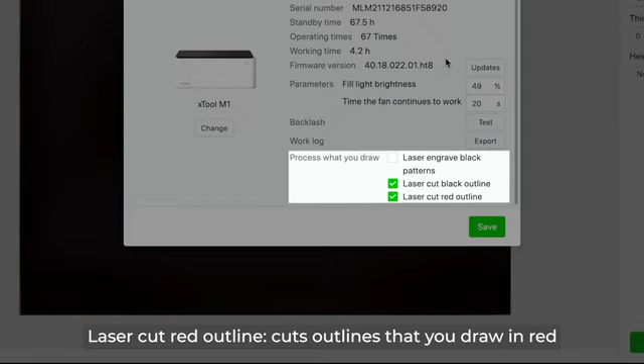Process what you draw. This is an offline function. The device can recognize what you draw and process it without connecting to XCS, and you can set how it works. Laser engrave black patterns. Engraves patterns that you draw in black. Laser cut black outline. Cuts outlines that you draw in black. Laser cut red outline. Cuts outlines that you draw in red.

Import. Import an image. After importing an image, you can set the properties of the image. Filter. You can add a grid filter for the image. Sharpness. With other settings unchanged, sharpness is related to the clarity of detail in an image. Grayscale. The grayscale is related to the contrast of light and shade. Slide the block on the left to the middle to enhance the shade. Slide the block on the right to the middle to enhance the light.

Insert. Select to draw a common shape. Line. Rectangle. Circle. Shape. Inserts a shape. Text. Inserts a text. The default text is "your text here." After inserting the text, you can change the words, set the font size, typeface, and spacing.

Vector. Select to draw a vector path. After drawing a vector path, you can double-click an anchor point to convert it to a rounded corner, or back to a corner, and adjust the curvature.

Extract. Extracts images from the image captured by the camera of a device. This function is available only when XCS has connected to a device with a camera. You can use the magic wand, eraser, and crop tools to extract the image you want, and then you can use the image for processing. Crop keeps the area you select. Eraser erases the area where you click from the image.

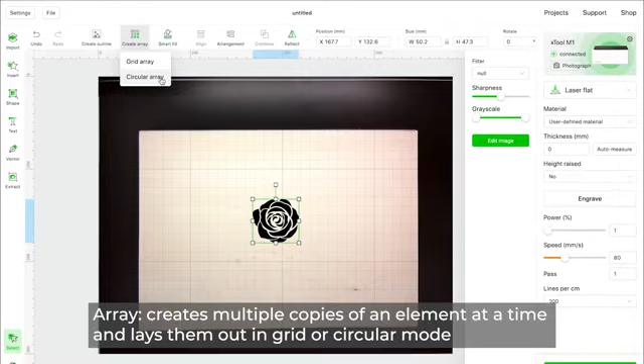Smart Fill duplicates a design element for multiple materials, helping you process multiple materials at a time. Edit your design for one material, and then click Smart Fill. The same design is generated for other materials.

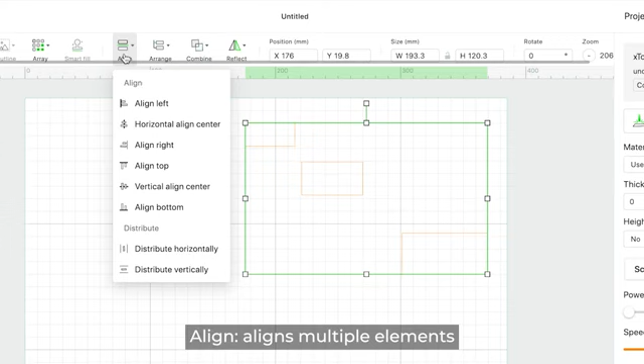Align aligns multiple elements. For example, to align the elements shown in the following figure: Align left. Horizontal align center. Align right. Align top. Vertical align center. Align bottom. Distribute horizontally. Distribute vertically.

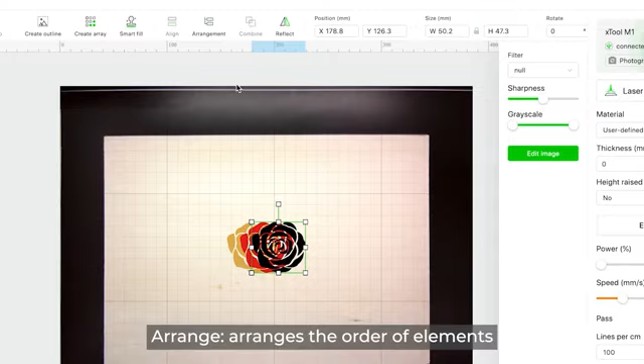Arrange arranges the order of elements. You can bring an element to front or send it to back, or bring it forward or send it backward one layer by one layer. For example, to arrange the elements shown in the following figure: Send to back. Send backward. Bring forward. Bring to front.

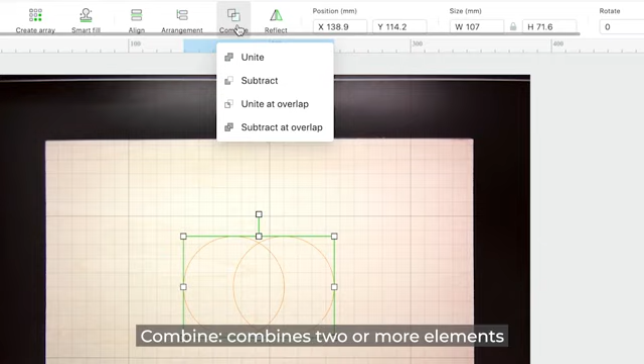Combine combines two or more elements. When you unite the two elements. When you subtract the two elements. When you unite the two elements at overlap. Click Engrave. When you subtract the two elements at overlap. Reflect reflects an element horizontally or vertically. When you reflect the element horizontally. When you reflect the element vertically.

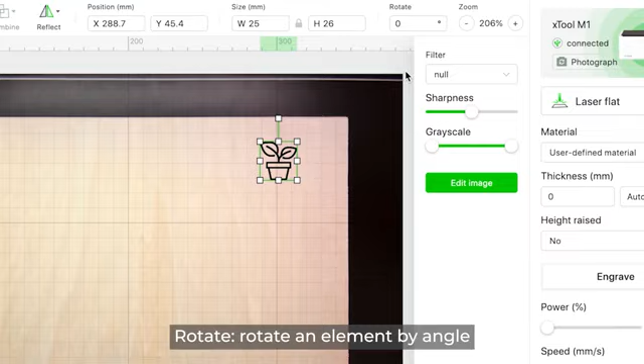Position sets the position of an element on the canvas by the X and Y coordinates. The point 0, 0 is in the upper left corner. The unit can be set in settings. Size sets the size of an element. The unit can be set in settings. Rotate rotates an element by angle. A positive value indicates rotating clockwise, and a negative value indicates rotating counterclockwise.

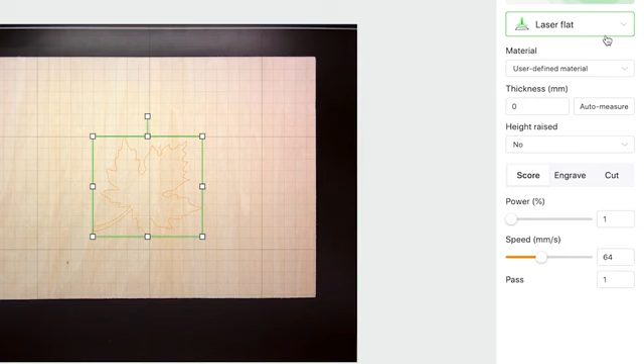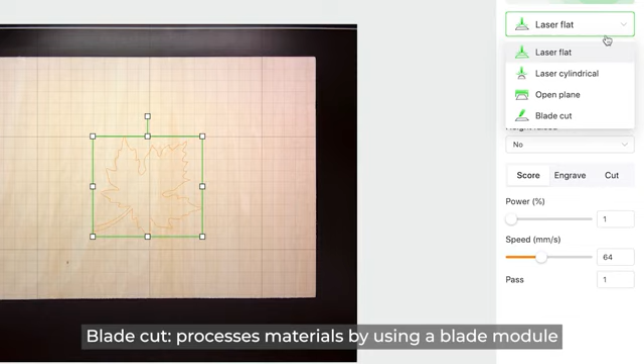Zoom zooms in or out the canvas or fits the canvas on screen. Canvas management: you can add, delete, or rename a canvas. Laser flat processes flat materials by using laser beams. Laser cylindrical processes cylindrical materials by using laser beams. Open plane processes large area materials with the base plate of the device removed. Blade cut processes materials by using a blade module.

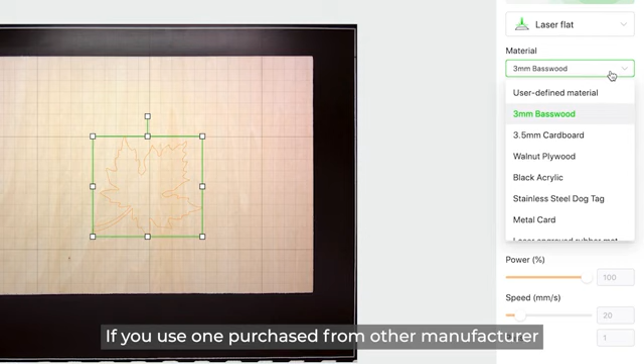If you use a material launched by xTool, select your material from the drop-down list box. If you use one purchased from other manufacturers, set it to user-defined material. If you use a user-defined material, you can click Auto Measure to enable XCS to measure the thickness of the material. If Auto Measure fails, use a caliper to measure it and enter its thickness. If you have raised your material by using triangular prisms, select Triangular Prism.

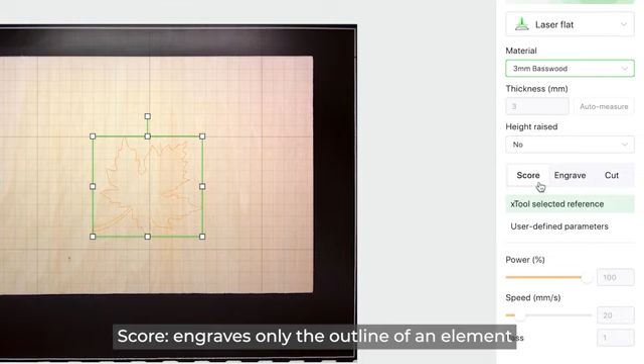Score engraves only the outline of an element. Engrave engraves the fill of an element. Cut cuts the outline of an element. Power sets the power for engraving or cutting. Speed sets the speed at which engraving or cutting is to be performed. Pass sets the number of processing times. Path Preview displays the processing path of your design elements. Framing shows the area to be processed on the material.

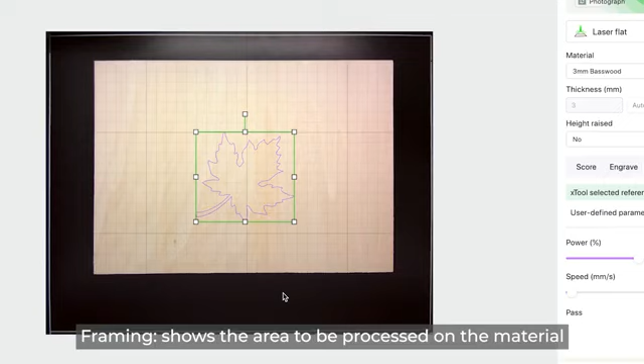If the design elements are to be processed as expected in the expected area, click Send to send the file to your device. Press the button on your device to start processing, and wait for the processing to complete.